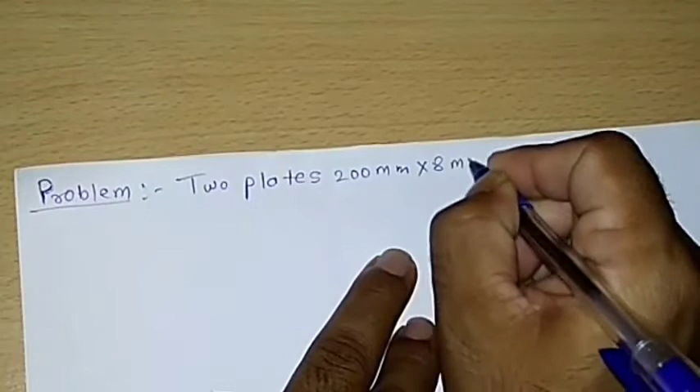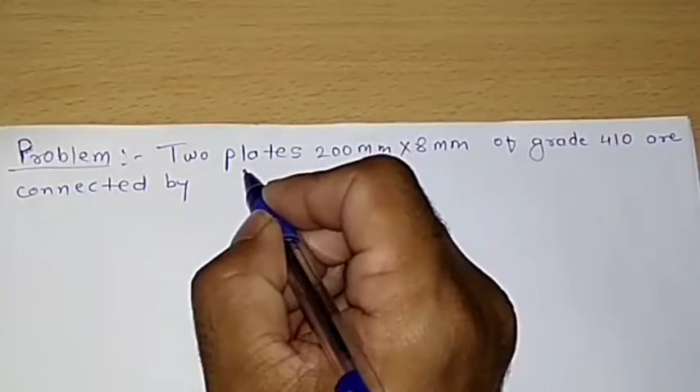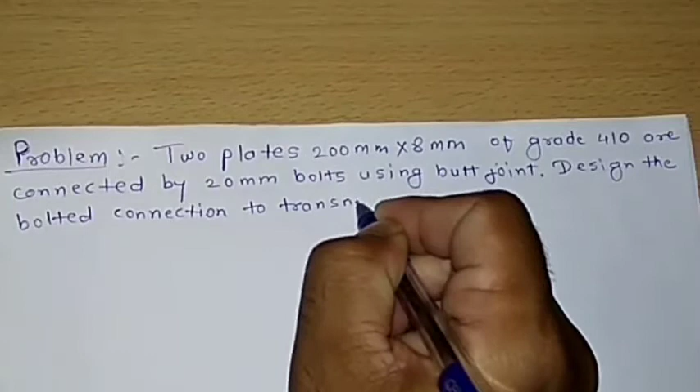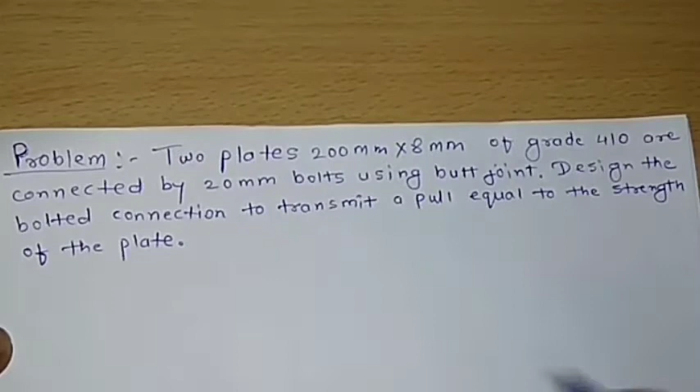So the problem is: two plates 200 mm by 8 mm of grade 410 are connected by 20 mm bolts using butt joint. Design the bolted connection to transmit a pull equal to the strength of the plate. Bolts are of grade 4.6.

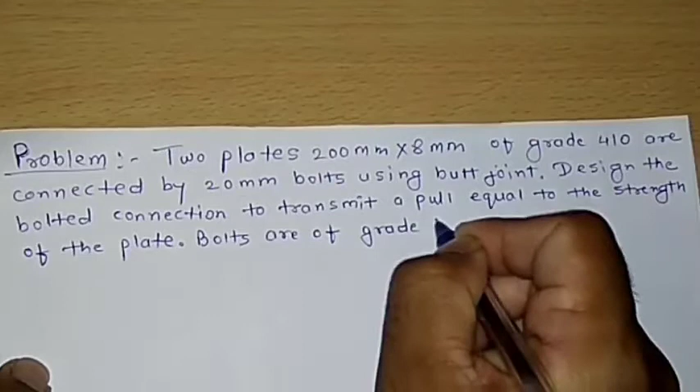So this is a problem in which two plates 200 mm by 8 mm of grade 410 are to be connected by 20 mm bolts using butt joint. Now we need to design the bolted connection to transmit a pull that is equal to the strength of the plate. The grade of the bolt is also given, and that is 4.6.

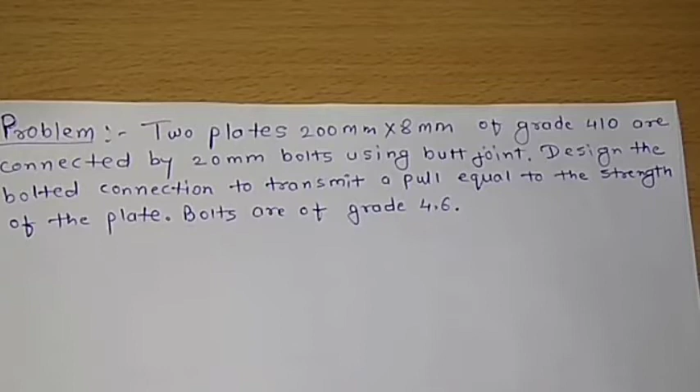So we'll solve step by step. First of all, we'll go through the given data, then we'll calculate the tensile forces. Once we calculate the tensile forces, then we'll go for the calculation of number of bolts and e distance, p distance, and that would be your final number of bolts.

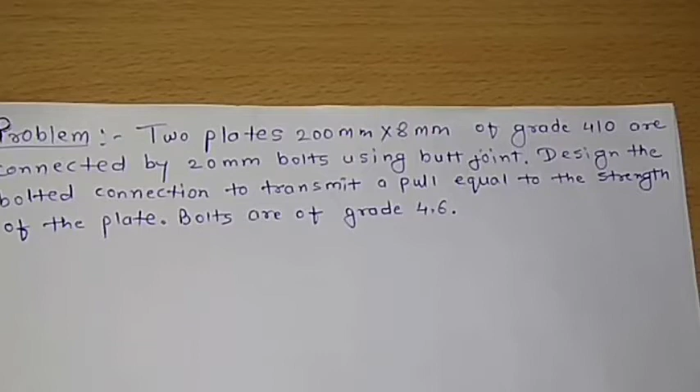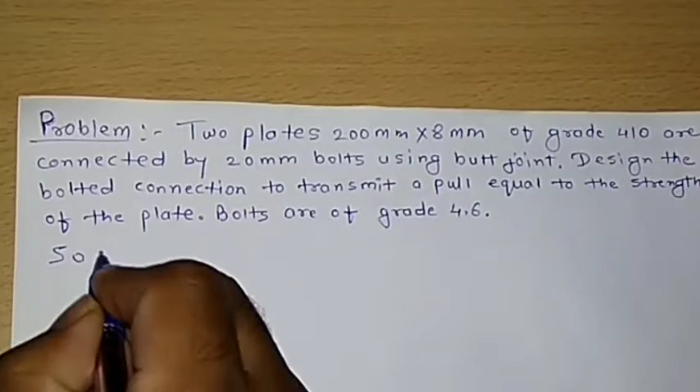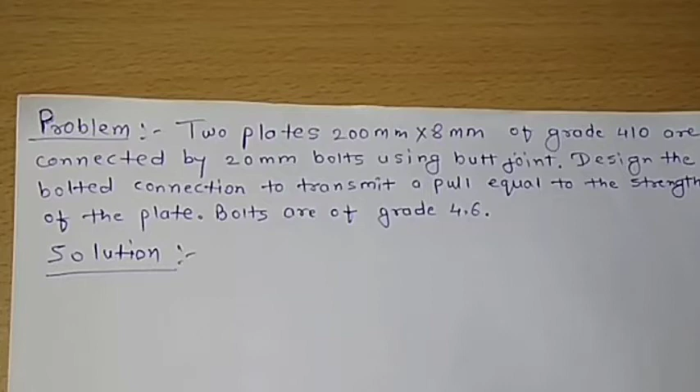So we'll go ahead with step number 1. So step number 1 is given data.

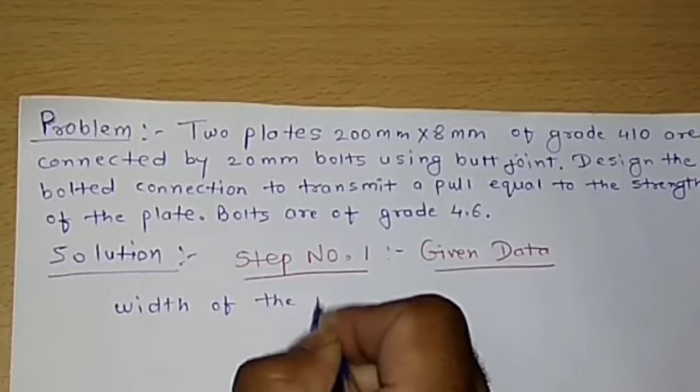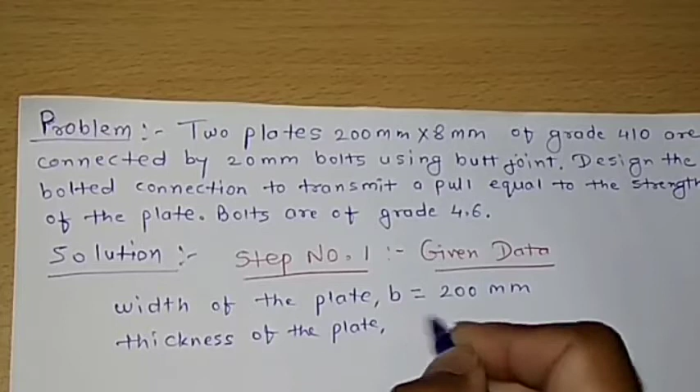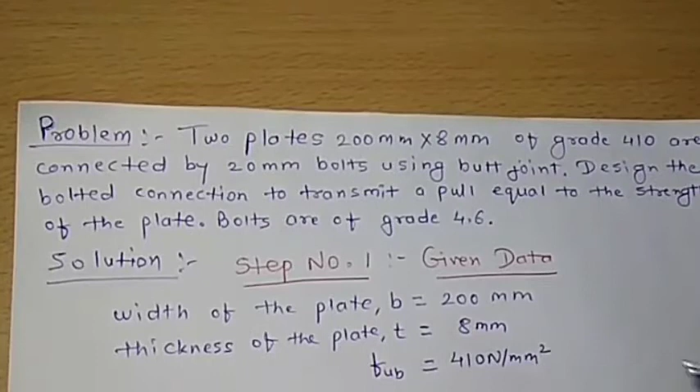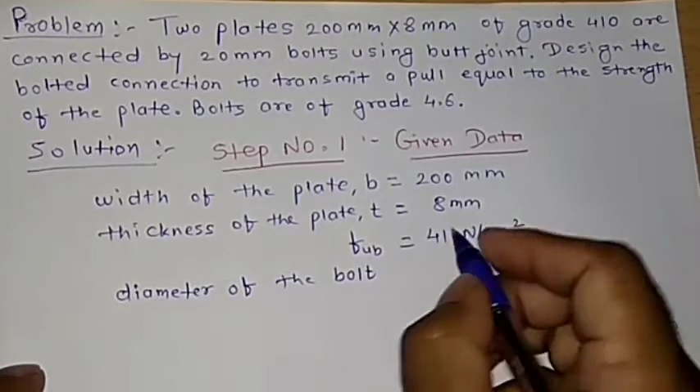So the given things are: plate size, width of the plate, denoted by B, and that is equal to 200 mm. Then thickness of the plate, denoted by small t, and that is equal to 8 mm. Then material of the plate, or you can say fub, which we already seen, that is 410 Newton per mm square. And then diameter of the bolt, denoted by small d, and that is equal to 20 mm.

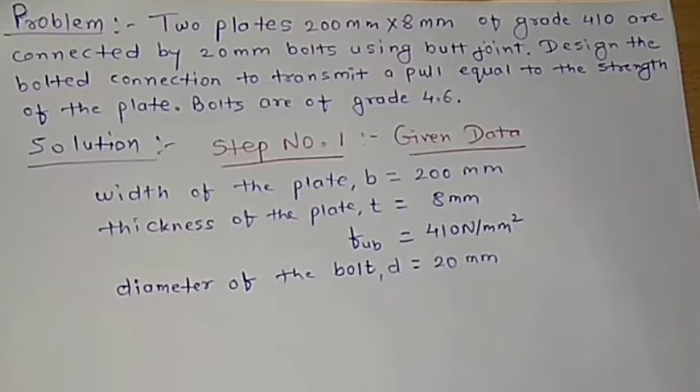Now we'll go ahead with step number 2. So that's all given in the given data: width is given, thickness of the plate is given, FUB, and then diameter of the bolt. So now we'll go ahead with step number 2, which is to calculate tensile forces.

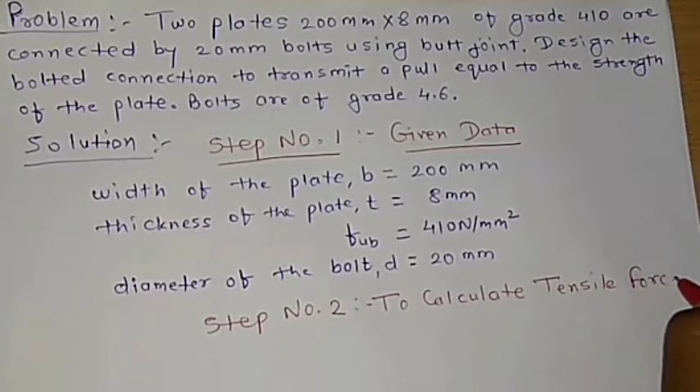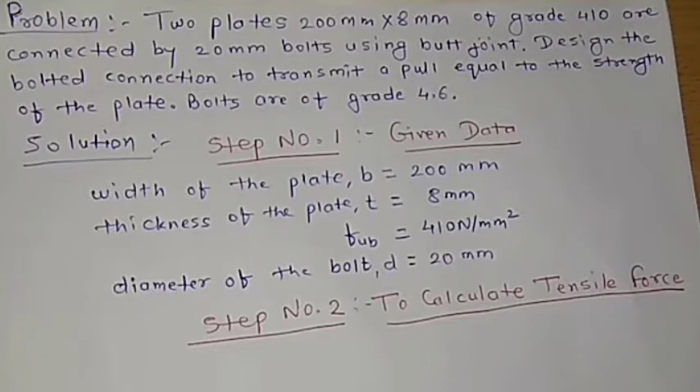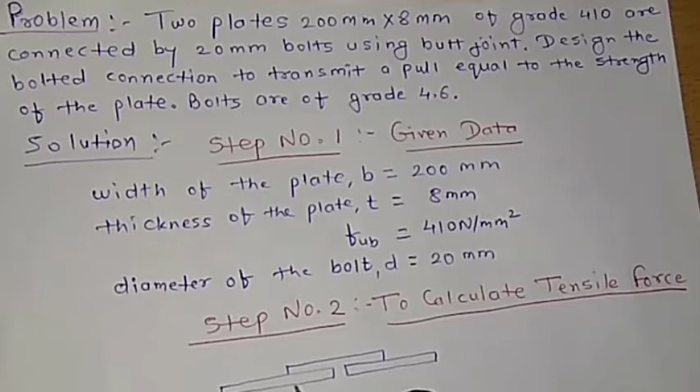First of all, we need to go ahead with the required thickness of the cover plate, because you need to understand that whenever we solve this, we need to joint it by a butt joint. So what does that mean? Let us say this is one plate, and this is another plate, and since we need to join it with the help of a butt joint, we require one cover plate, and we require another cover plate.

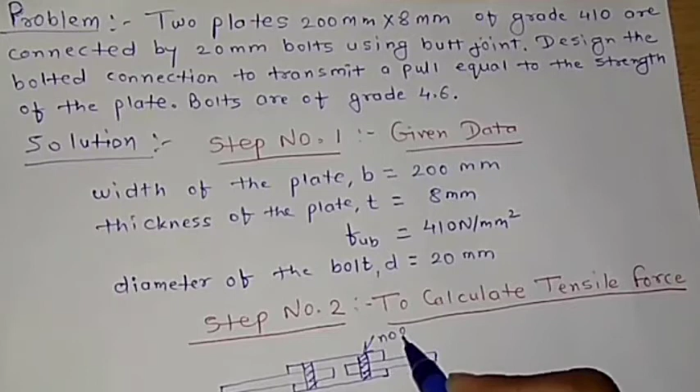And here there would be certain bolts. So this is just to display what exactly the thing is going to be, and we need to calculate the number of bolts and the size of this plate. This is actually the cover plate. So we need to check the cover plate as well as the number of bolts. And this is called a butt joint.

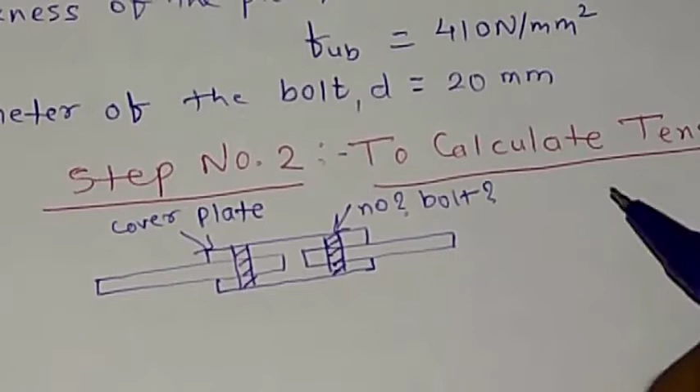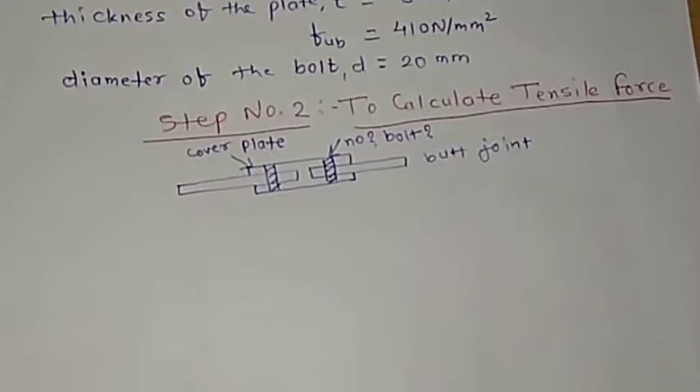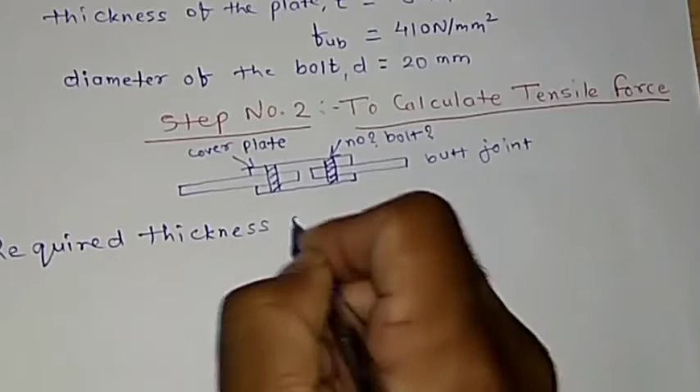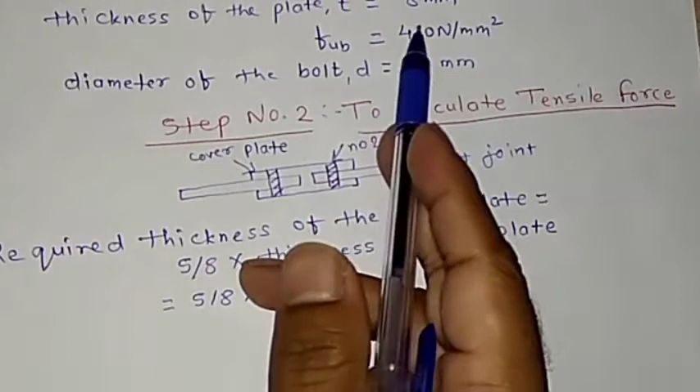So we'll go ahead one by one. The required thickness of the cover plate is given by 5/8 times the thickness of the plate. So this equals 5/8 times the thickness of the plate. If we calculate 5/8 times the thickness, which is already given as 8 mm, so 5/8 multiplied by 8, that gives 5 mm.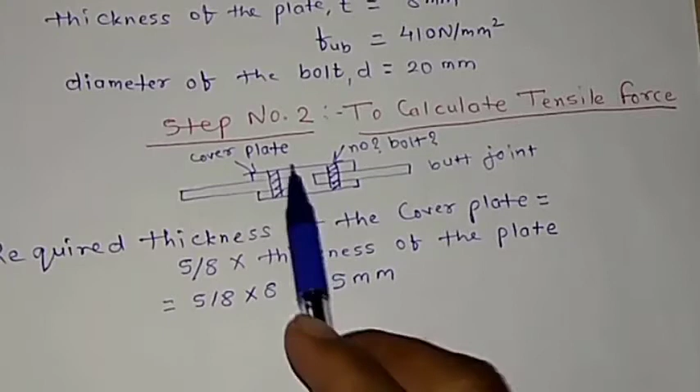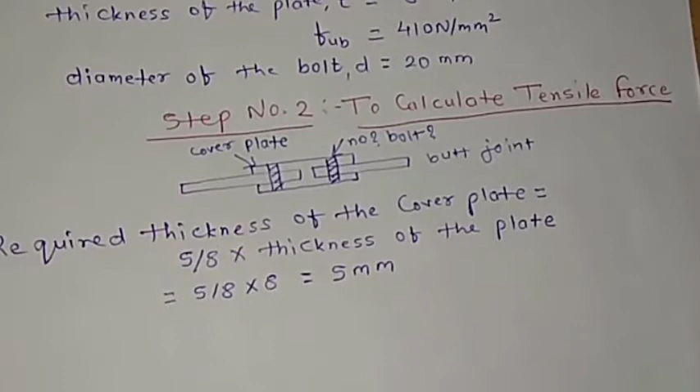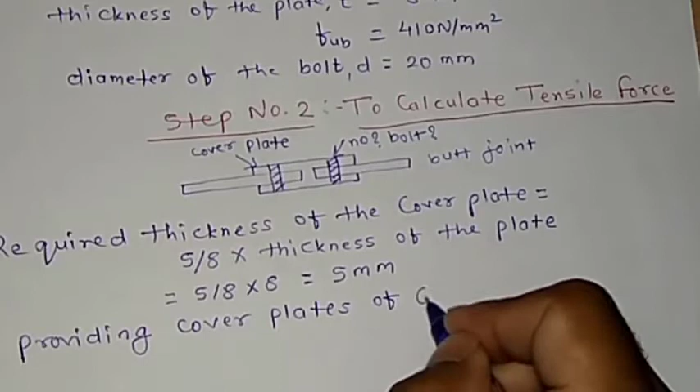So that is the required thickness we need for this cover plate, and that is the minimum thickness. We can provide more than that thickness of the plate. So providing cover plate of, let us say, 6 mm thickness. So you can write down here: providing cover plates of 6 mm thickness.

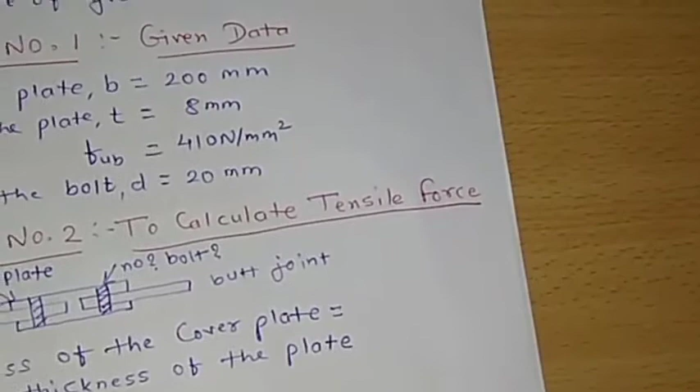And let us say we need to provide 2 bolts in one row, 2 bolts in one row. Suppose, let us say it is in plan. So let us say this is in plan.

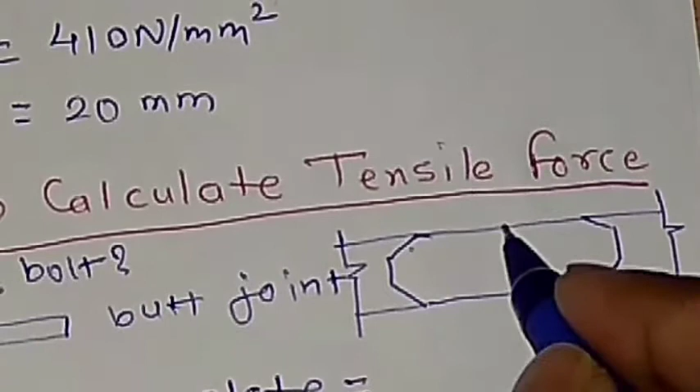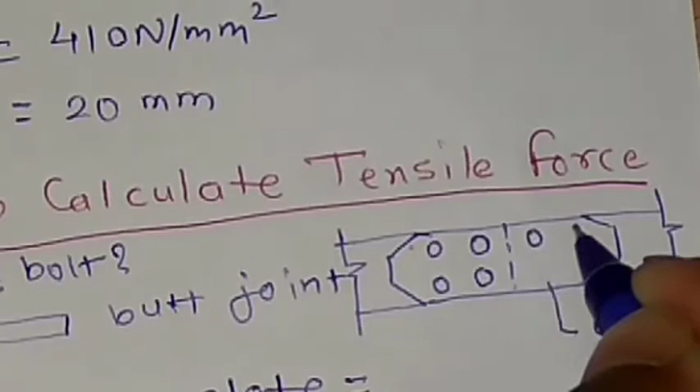So in plan you will see the cover plate like this, and this is the main plate, and this is the cover plate. So suppose if you mark here the center line, in this case when we say 2 bolts in one row, it means like this. In that case you can see you will have like this.

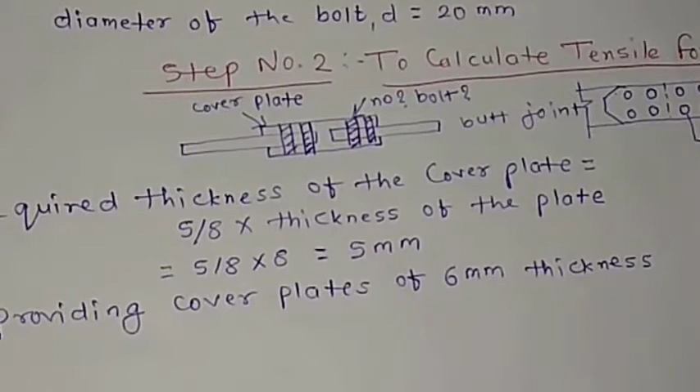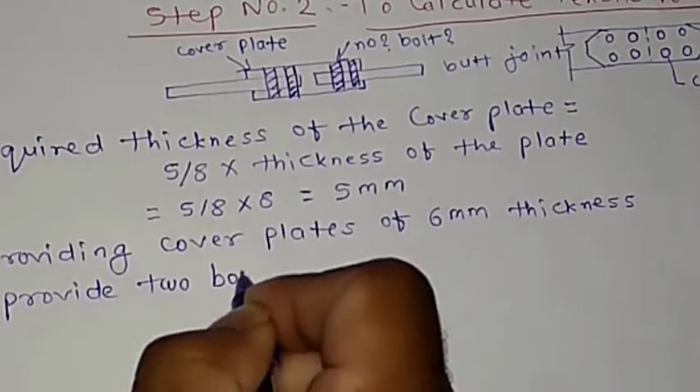So we'll move towards our problem. We can write down: provide two bolts in one row, as I have shown you in the diagram.

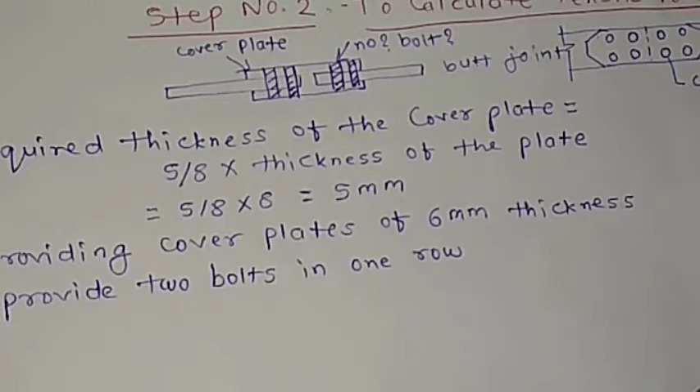Now according to clause number 6.3.1, page number 32, which we already saw in earlier cases, earlier problem, we need to first calculate the tensile force.

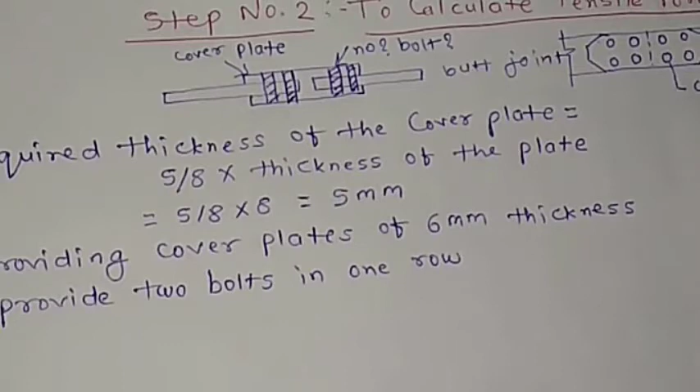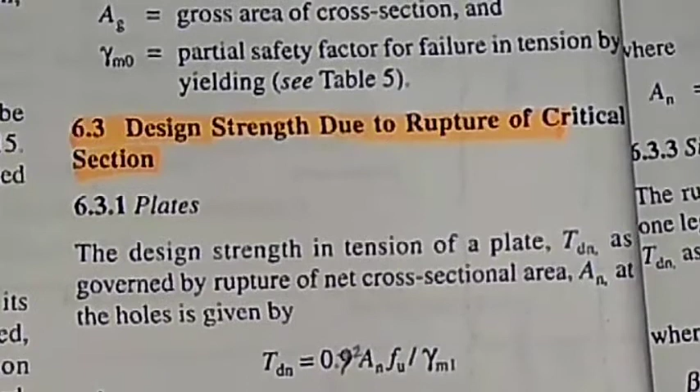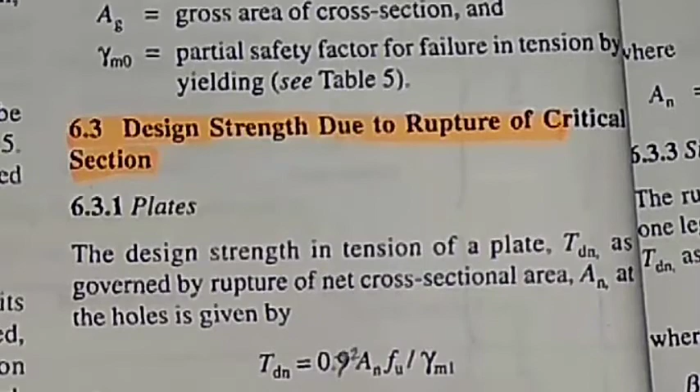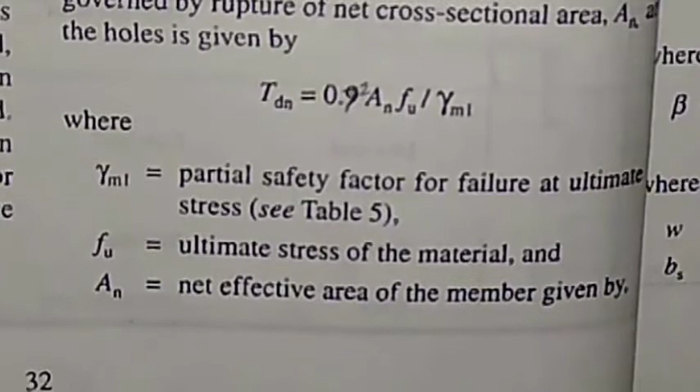So what does it say? Again, design strength due to rupture of the critical section, and the design strength in tension of a plate, that is TDN, is given by the formula 0.9 AN FU divided by gamma M1. And what does this indicate? Gamma M1 is the partial safety factor from table number 5, which is on the earlier page. FU is the ultimate stress of the material, and AN is the net effective area.

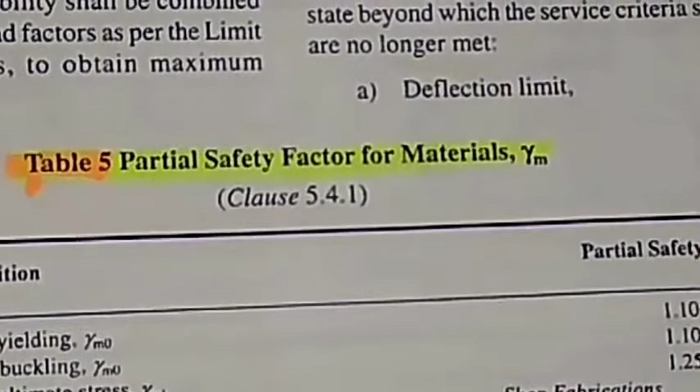So for gamma M1, we go to table number 5. Here gamma M1, you can see this is the resistance governed by ultimate stress, and gamma M1 is 1.25.

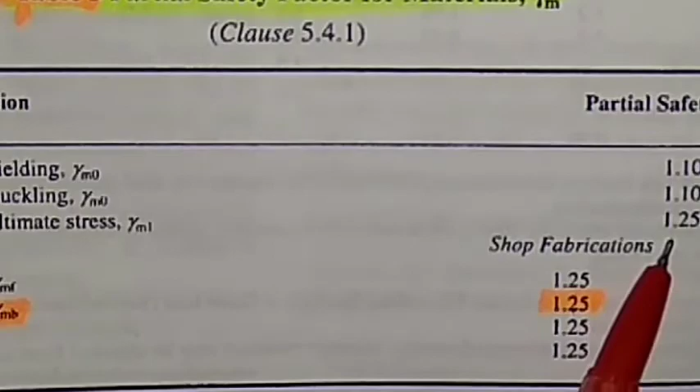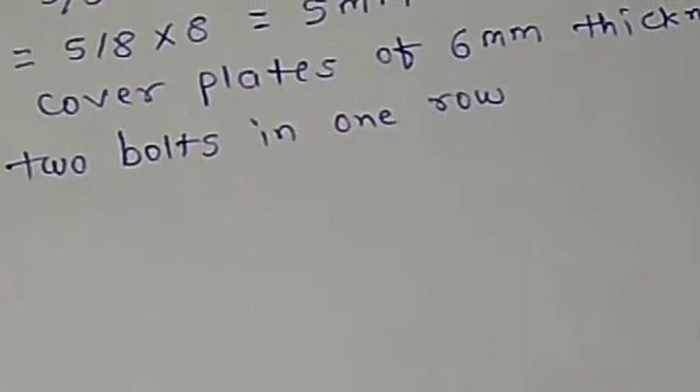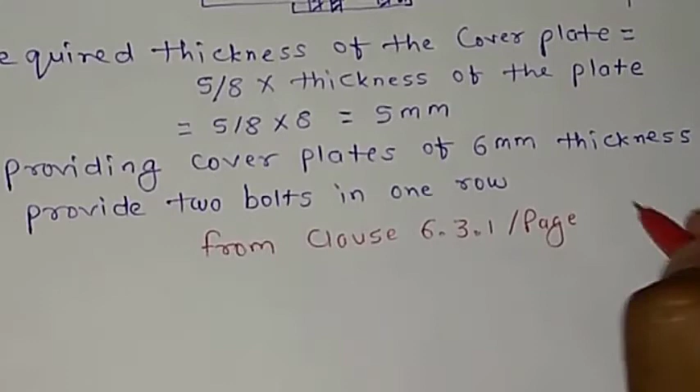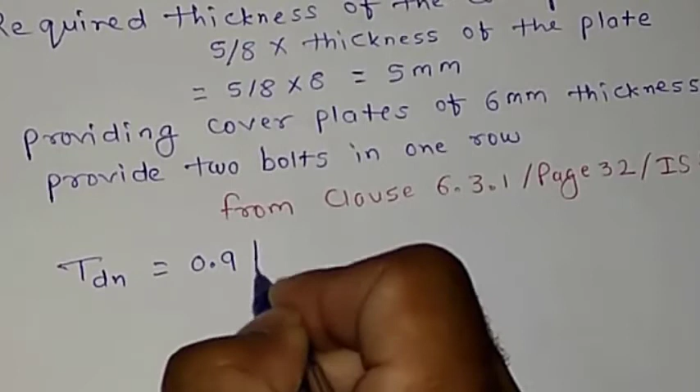So I'll write down, from clause 6.3.1, page 32 of IS 800, we have TDN equals 0.9 FUB AN divided by gamma M1.

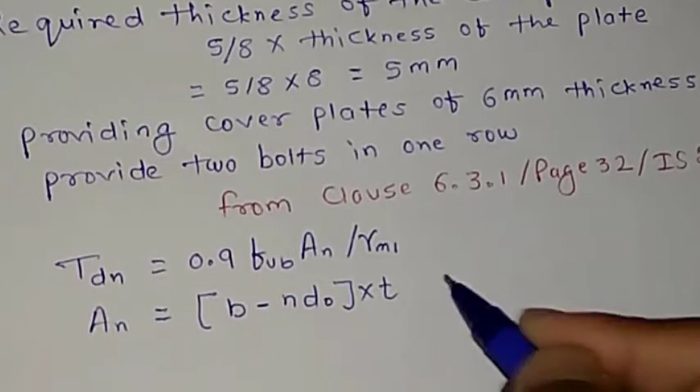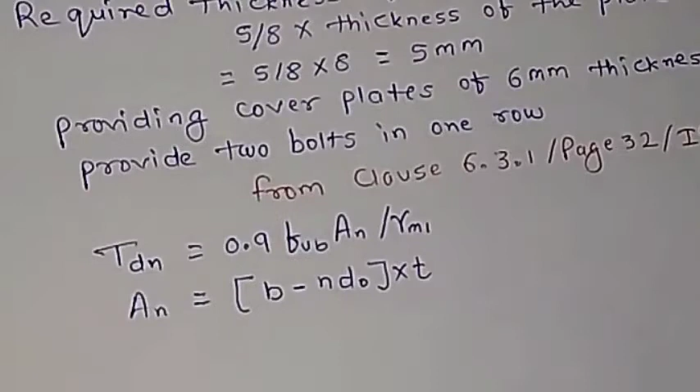Now here first we need to calculate AN. AN is the net effective area. So if we talk about the net effective area, that equals B minus N D0 multiplied by T. This is again on the same page - you can see on the next page you have this, AN equals B minus N D0 into T. That is on the next page, page number 33.

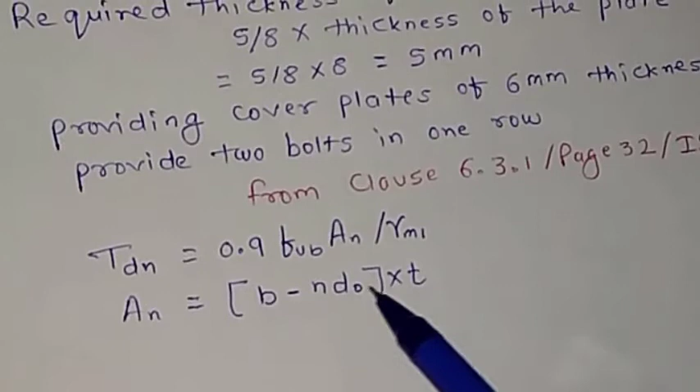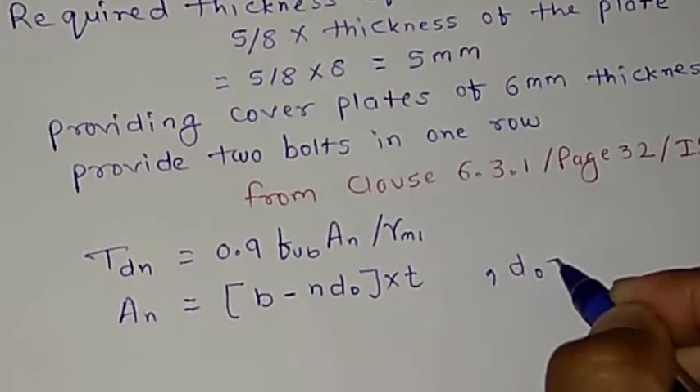Now we got the width, we got the thickness, we got the number, as we are saying that is 2 bolts in one row, and then D0 - D0 is the clearance, bolt clearance. As you know, D0 will equal D plus 2. So that is 20 plus 2, that is the clearance we considered, hole diameter, and that is 22 mm.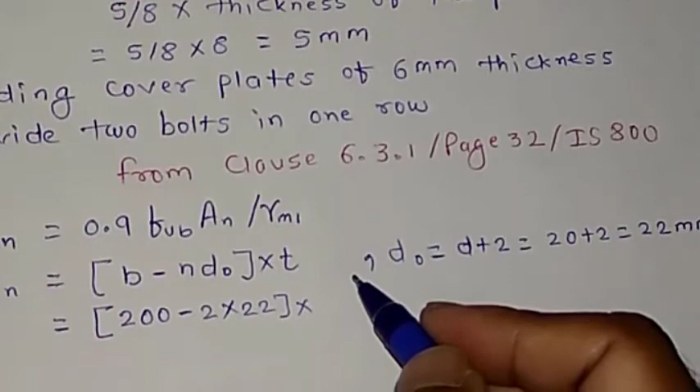So now therefore we'll get AN, that is B, you got your width, that is 200 mm. This equals 200 minus N, because we are saying 2 bolts in one row, 2 multiplied by D0, it is 22 mm, multiplied by thickness - thickness of the plate, not the cover plate but the main plate, that is 8 mm here.

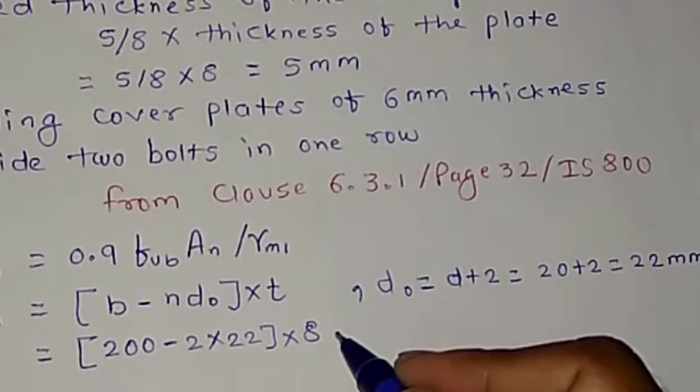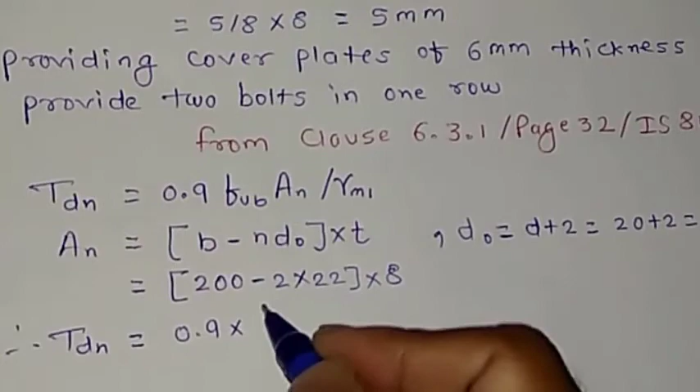So now if you put this AN into our TDN formula, we will get TDN equals 0.9 FUB - we got FUB, that is 410, as you know, ultimate stress of the plate material, that is FUB. AN you got, you can directly put this value: 200 minus 2 into 22, multiplied by 8, and divided by gamma M1, as gamma M1 is 1.25.

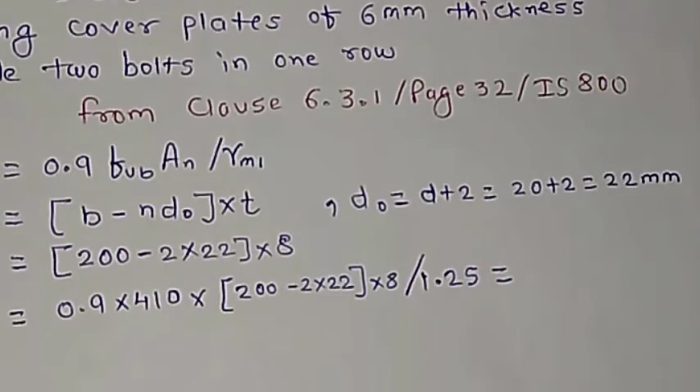So if you solve this, you will get TDN, that is the tensile force to be carried by the plate - how much tensile force that plate can carry. For that you will get around 368.4 kilonewton. So that's the value of TDN.

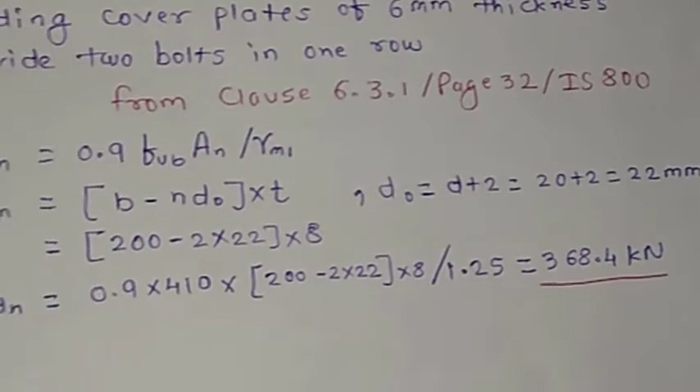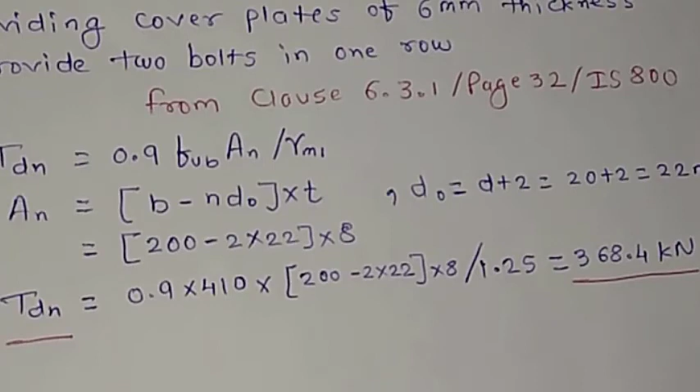Now in the next step, we will calculate the number of bolts and pitch in the next video, where we will go on to solve strength of bolt in bearing, strength of bolt in double shear.